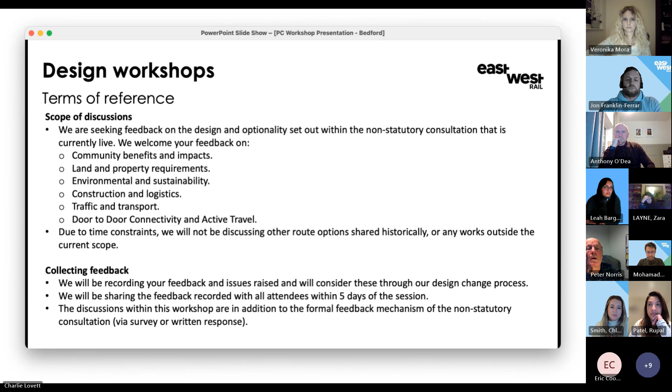Next slide please. So as well as these online workshops that we're carrying out with the LRG parish councils and ward members, we've also been doing some engagement with the local authorities.

So we had an in-person workshop in December last year with the Bedford Borough Council officers. That was a really good workshop, and we covered quite a lot of ground, but I've listed some of the key topics here. They were especially interested in environmental impacts, so noise impacts, as well as potential flooding impacts in Bedford town centre.

They were really interested around the traffic and congestion impacts of the project, especially in terms of the rebuilding of any road bridges. So had some concerns around that.

We had some really good discussions on the 2 stations, about connectivity, the facilities at those stations, and car parking at those stations.

The Bedford Borough Council are still opposed to the 6 tracks through Bedford Centre and would support keeping 4 tracks. They also gave us some really good feedback around some of the local proposals around the viaduct and the A6 carriageway, as well as Stewartby and Tempsford Station.

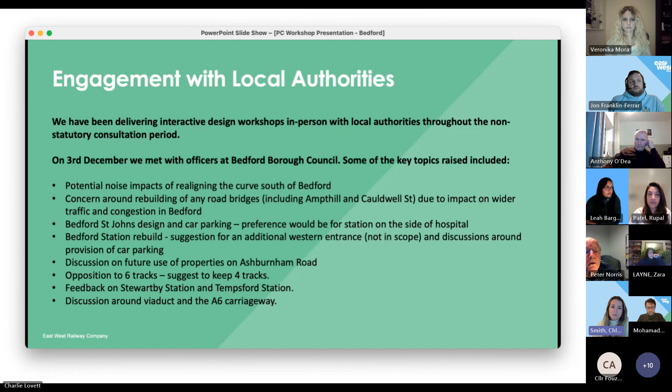So now I will hand over to Rupal, who will give you an update on where we're at with the project currently. Great, thank you, Chloe.

As you know, this is a major infrastructure project with lots going on in the development process, and there's a lot of assessment that happens. So we just wanted to show you a snapshot of the timeline of where we were, where we are now, and where we plan to be in the near future.

So far, if you look back to the beginning of the timeline, we have held 2 non-statutory consultations, a route update announcement sharing our preferred route, and lots of engagement with yourselves through LRGs throughout this process.

We are now in the stage of the process where we're consulting on the current proposals, using all the feedback we get from the non-statutory consultation engagement with all our stakeholders and considering that as part of the design process. So we're not only engaging with yourselves, we're looking at statutory and non-statutory stakeholders as well.

After that period, we plan to move forward by refining the design development, which includes environmental assessment work and mitigation development.

This will then be presented at statutory consultation, and we'll have more information on the impact of the project that we'll be able to share with you.

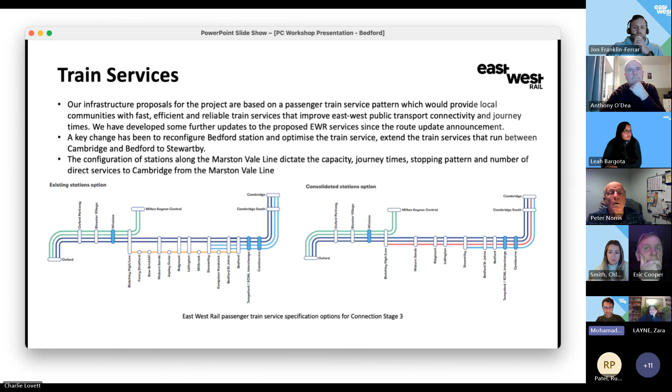There are 2 permutations of the actual service pattern, one aligned with service concept 1 and one aligned with service concept 2. From a Bedford perspective, the same number of trains would operate really - there's no changes between the service patterns as far as Bedford's concerned.

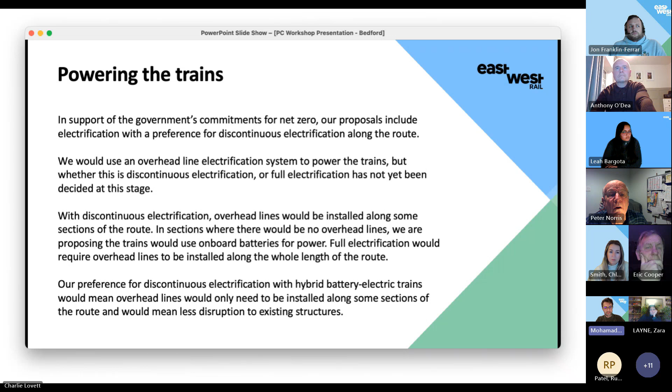Powering the trains, really just reiterating what we announced at the actual events. So discontinuous electrification is our preferred solution for powering the trains, and the implications of that in terms of the infrastructural proposals.

Our principles around freight: reiterating that we are predominantly a passenger service. However, as part of our proposals, we're aiming to maintain the existing freight in key commuter hubs, including Oxford, Bicester, Marston Vale Line, and Bedford. We're also considering planned increased future growth required to enable wider economic growth, and these proposals will mature as part of the next consultation.

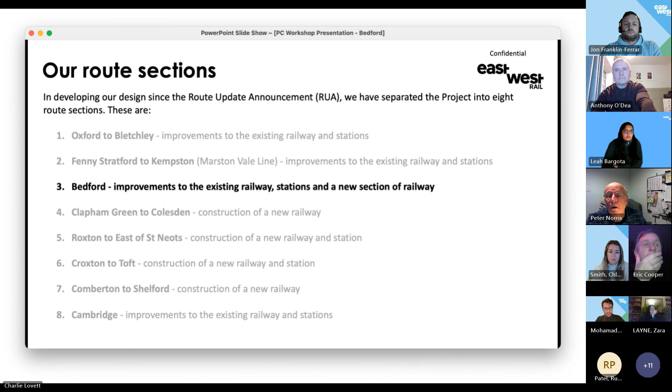Just the generic summary slides, which hopefully you all know about now. The Bedford extension spans 5.4 kilometers, that's section 3 in the consultation, from Ampthill Road in Kempston to Clapham Road, next to the River Great Ouse. I already talked about the 2 platforms at Bedford Station, so I won't repeat that.

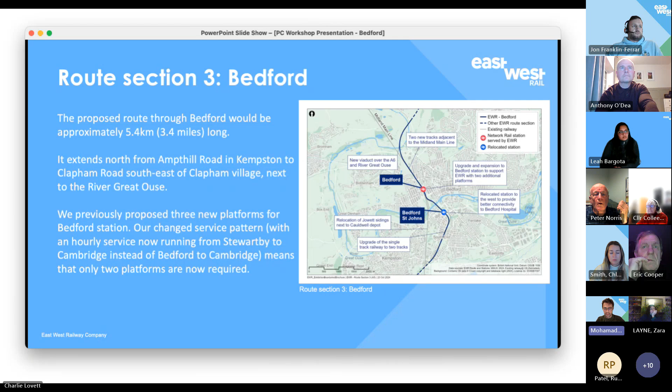A summary of the scope or proposals really. These will be talked about in more detail when Jon presents and shows you plans and profiles. But in essence, we're relocating Bedford St John's Station to the site of the current Britannia Road car park, closer to Bedford Hospital.

We're building a new multi-storey car park to replace lost car parking, owned by the hospital as well as other stakeholders in the area, as well as considering what happens during the actual construction of the multi-storey car park. We're building 2 additional tracks across the entire area.

If you think about the realignment at BSJ being a new piece of P-way, we're moving Jowett sidings to the Cauldwell Walk depot area, making space for the railway. We're building a new station at Bedford Station and providing other station improvements. And last but not least, we're building a 1.1 kilometer viaduct that crosses several highways and the Great River Ouse twice, to join an embankment in the core section.

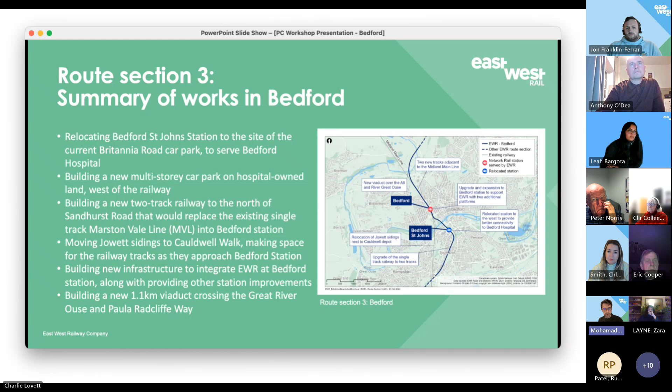Area in Clapham. I'll just hand over to Leah to provide some slides on environment.

Thanks, Mo. So the environment is a key consideration in the development of our proposals, and to demonstrate our commitment to this, we are taking a proactive approach in terms of environmental considerations, using environmental data as a fundamental part of developing designs that avoid, reduce, and compensate for potential impacts on the environment.

Since 2021, the government has published a new policy setting out its environmental goals, and in response we've updated and aligned our environmental sustainability strategy, also published on the East West Rail website. Central to our approach are the 6 environmental sustainability pillars: natural environment, carbon, climate resilience, historic environment and landscape, circular economy, and people and community.

Moving on, further consideration of the potential likely environmental impacts of the proposals and initial mitigations are described in the environmental update report. This is also included as part of the consultation and available on our website. The mitigation proposals can be viewed on the plan and profile drawings, which also support the consultation.

We will prepare a preliminary environmental information report for the statutory consultation, as well as producing an environmental statement, which will be submitted as part of our application for the development consent order. Further design development will take place in parallel with the environmental impact assessment and supporting surveys, modelling, and technical assessments. Information on the EIA process will be used to inform the development of appropriate mitigation measures as part of the ongoing design development process, and will also support more detailed analysis of biodiversity measures needed to deliver biodiversity net gain.

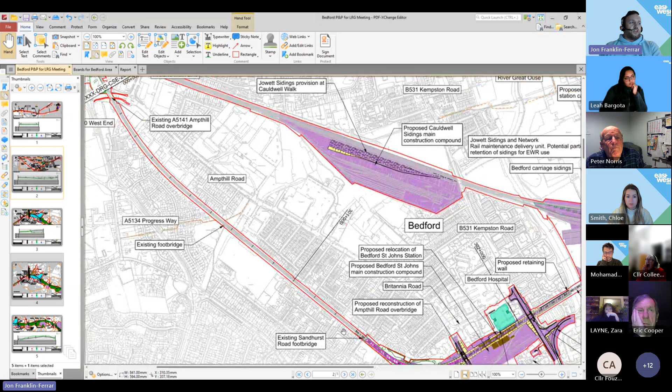The first 1.3 kilometres of the Bedford section runs from the crossing of Ampthill Road overbridge at the top of the drawing through to the start of the MVL curve. This curve here, just to the south of Bedford St John's station, is largely unchanged. There's no proposed realignment of any of the track. Any works undertaken in that area would be inside the existing rail corridor.

So the specifics of any interventions in there will be determined as we go on. It's likely to be things like changes to signalling, moving of track joints and things like that, but work within the corridor. So there is nothing of significance in that first 1.3 kilometres that is worth going into any detail of today.

Once we come to Sandhurst Road footbridge, this is where the existing railway goes from the 2-track corridor that we have on the left here to the single track railway that runs around this very tight curve and through the existing Bedford St John's station. The radius of this curve is approximately 180 to 200 metres.

It's very tight, so from a railway geometry perspective, that is much tighter than we would typically like. It is necessary to realign that curve for 2 reasons: to achieve the required permissible speed for the train service specification, and in conjunction with that, the relocation of Bedford St John's station.

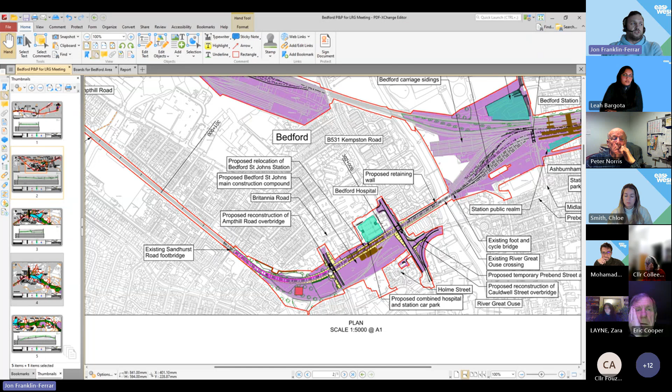I will talk about Ampthill Road and Cauldwell Street together in a second, but first, as we go into the Bedford St John's station area, the multi-storey car park that is being proposed is located to the west of the railway. It's sited on part of the existing surface car park, positioned to correlate with the master plan of the Bedford Hospital, who have plans for a multi-storey car park in that area as well. For simplicity, we haven't shown all the details of the station on this drawing because it wouldn't be clear, but you can see the two platforms. There are station buildings and facilities shown on the east, with the intention that they could be accessed from the east through the Melbourne Street car park.

Once we go past the station, we climb up to the crossing of the River Ouse. There are two crossovers proposed in this area between Cauldwell Street and the River Ouse. Once again, we haven't shown them on this drawing just because you wouldn't be able to see the detail, but that is a piece of track infrastructure necessary for the operational movements of the trains.

Ampthill Road on the left here, Cauldwell Street on the right. Realignment of those highways is necessary for two reasons. The primary reason, however, is the inclusion of provision for overhead electrification of the railway. What we have aimed to do is minimise the change to these highways by lowering the railway as much as we reasonably can, whilst lifting the highways as much as is necessary. Once again, this is a very fine balancing act.

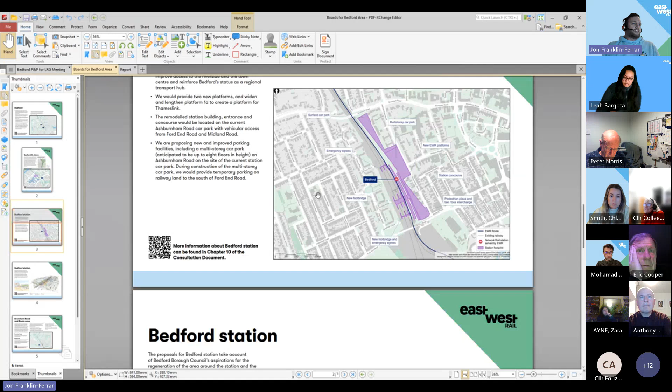Well, let me go to these slides. Hang on, let me see if we got the... that's not in there, it's in the report. Hang on a sec, let me find the right picture for you. It's easier for me to describe. Okay, so...

The pale blue line going along the centre of the highways is the extent of the realignment. Because Cauldwell Street has to be lifted to achieve the electrification clearances under the bridge, and because of the existing steep gradients on that road, it takes quite a long time to regrade the highways back to the existing level, which is why it extends so far.

What that results in is that the entrance to the car parks for the two businesses ends at a level difference between their car park and the road, so you could no longer turn from the main road into their car park. So what we've looked at is whether there's an alternative access, and potentially there is from the rear via Holme Street. So that's the principle of where that bit of the design has come from.

Okay, thank you. Councillor Atkins asked quite a lot of questions during your presentation. Have all of those questions been answered? My apologies, I'm not looking at the chat.

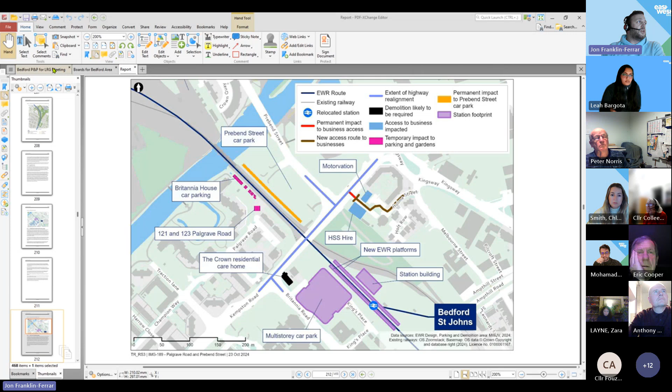These are the prefacing questions that were asked about whether we'll commit to replacing car parking before construction, etc. In terms of the proposals for replacing car parking, the intention has been that the multi-storey would have to be constructed and operational before the rest of the surface car parking is removed.

And there was another question about the impact from noise at a Cauldwell depot site due to the relocation of the sidings to the industrial estates.

So I can talk about that very briefly, but we'll go into that detail when we talk about area 2. Yeah, I suggest we cover that off in the next area. Yeah, just please remind me of the question.

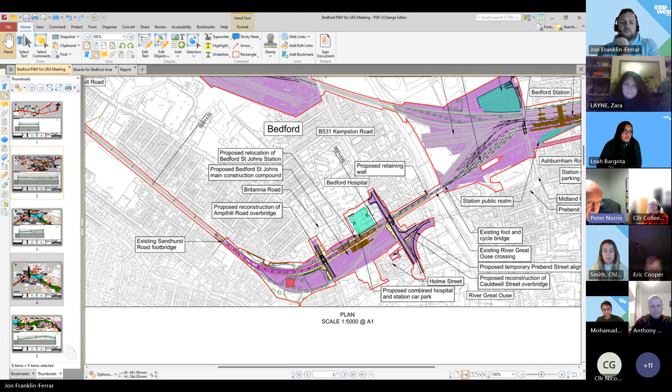Now, your presentation earlier said there's an alternative plan for a car park within the hospital's grand plan, which raises the question of how the two plans for a multi-storey car park sit together and who's going to be footing the bill. Are you able to confirm that the answer given to me by your chief executive is correct, and that the multi-storey car park is part of your build and part of your expected expenditure, with no further liability to anybody else, NHS or the borough, please?

Sorry, Peter, I'll just come in and try and correct the record. We're not suggesting there's going to be two multi-storey car parks near the hospital. The only car park that's proposed is the one shown in green on that drawing, and it's also the one being proposed by the hospital. The hospital's already got plans for building a multi-storey car park, and in displacing the car parking in the area, we feel it's appropriate that we replace it at the location that they want it replaced.

In terms of funding the car park, in terms of the capital costs, the position conveyed to you by David Hughes and Will is correct. We will be funding the car park. So we will be building the multi-storey car park at this location.

Yes, that's correct, but there's only one car park, it's not two. No, I understood there's only one car park, it's just that there were two plans to provide the one car park. Sorry, two plans to provide the car park is correct, I misunderstood your question then. Yeah, no, it's just only one car park, built by East West Rail and paid for by East West Rail. Correct. Thank you. Great, thank you.

And a final question or feedback from Councillor Headley. Yeah, thank you. I mean, obviously, again, talking about the same bridge. Obviously, the best option is not to have to do anything to the bridge. And you said there were two reasons: one was the electrification, and one was the crossing in the section before the bridge.

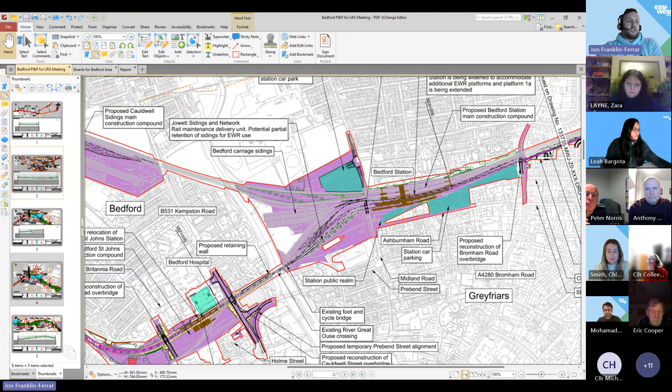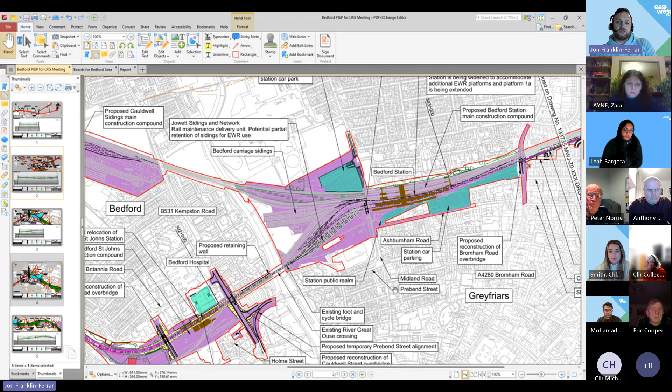As we come over the River Ouse, the crossing is a fixed site, both horizontally and vertically. The work undertaken thus far concludes that some strengthening works would be required on that structure. However, we are hopeful that the structure itself would not need to be replaced. If it did turn out that it needed replacing, it would need to go in the same location, horizontally and vertically, because you cannot move the track horizontally or vertically in any significant manner at that point.

Once you are north of the river, we continue with the two-track alignment that goes through the northern end of the existing GTR Jowett stabling roads and under Ford End Road. Because we sever the end of these roads, they are no longer viable for GTR stabling. They stable 12-car units here, which are 243 meters long, I think, off the top of my head. So if we remove some of that track, it's no longer viable for that rolling stock.

Therefore, we have to relocate on a like-for-like basis elsewhere. The preferred option for relocation of those stabling roads is down to the Cauldwell Walk site. What's shown here at the moment is the 5 stabling roads on a like-for-like basis. In reality, a lot of other additional infrastructure in terms of buildings, offices, and everything else associated with running the depot would be within the rest of the land on this site, but for simplicity we've just shown the track footprint at the moment.

Where the boundary goes around the existing Cauldwell depot, and we're showing the construction site across everything, that's purely where rail systems would have to be tied in. So there is no intention of changing anything within the existing rail depot. It's simply there in terms of the ability to tie in all the rail systems to make sure the Midland Main Line, the proposed sidings and the existing sidings all work safely together.

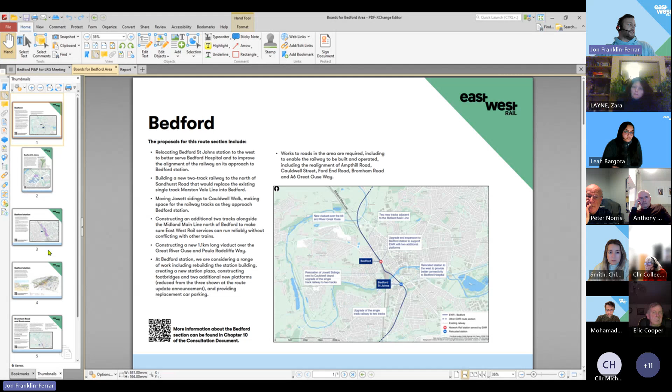The design does not preclude the incorporation of the Prebend Street diversion. We are not integrating that piece of infrastructure specifically because, as I understand at the moment, it is not funded, but our design does not preclude that piece of work.

We've got taxi and private car drop-off, bus stops, the multi-storey car park, and a reconfigured surface car park. That's what there is to say on this bit, and as we head up to Bromham Road, I'll talk about the specifics of that when we get to the next section.

We have a couple of questions. Yeah, so let's go, Peter, do you want to go? Oh, sorry, I shouldn't have my hand up. Oh, okay, no worries, that's right.

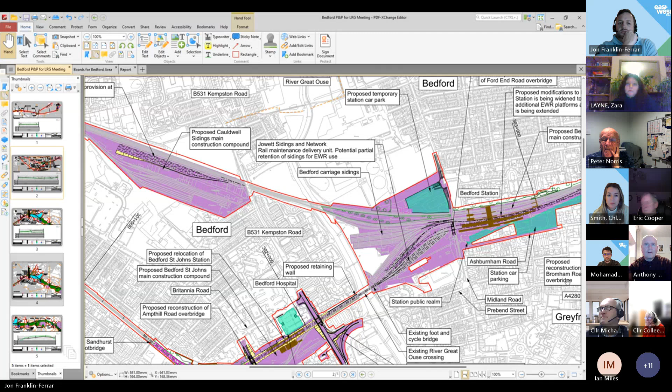That'll be something governed by standards. Things do change—I think that Luton fire was started by a battery fire. Standards at the moment only require fire suppressant and sprinklers for underground car parks. Our point is we want you to go beyond the standards. That's fair enough—I'm just saying where our baseline is, and it's so early at this stage we haven't even got an outline design beyond the sizing Mo described. But the outline and detailed design will pick up items like that. If you've heard us now, it might influence your thinking as you go to the next stage.

Any other feedback points or questions around Bedford Station? The question I'd ask for feedback on is: we've spoken a lot about the scale of the car park, and yes, it is a large building, but what other items do you think would be appropriate to consider? Mo mentioned potentially splitting the car park, and we've shown a temporary surface car park south of Ford End Road. Have you got any other thoughts, or do you think there's a better solution? Really, all ears for feedback.

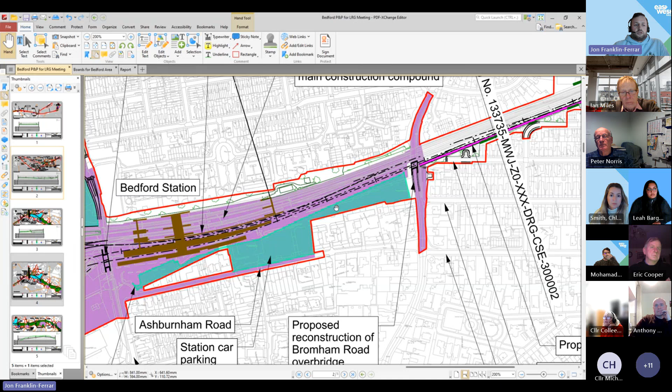What about the surface car park that's been suggested over on the west? What if that was a multi-storey car park instead of having something on Ashburnham Road? It's an option, I think I'd like to see a little bit more about it. It's not my area, as I say, it's Councillor Ben Foley's area, and he would probably be better placed to make comments on it. But I think any options rather than the big overbearing one on Ashburnham Road would be advantageous.

Thanks, Eric. Yeah, I've just got a general comment, not put down. When you come to do the design, the physical appearance of the station surrounds, can you make it iconic, interesting, and actually make it something which adds to the public realm there, not just a low-cost functional building? Because I have to say, the station at Bletchley, as it's been done so far, isn't very exciting, and this is going to be a public building for generations. So the ask is to make it as exciting as you possibly can.

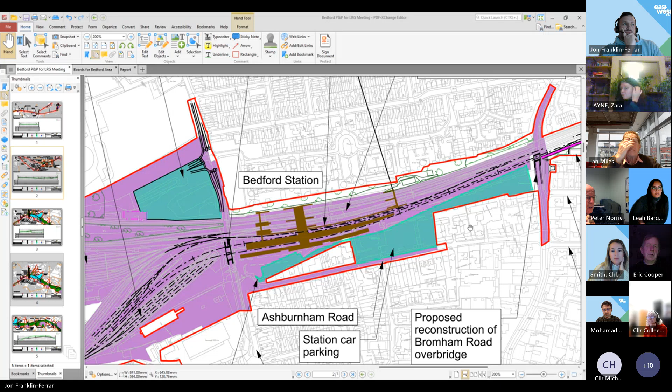Okay, thank you. I think Leah just kindly reminded us of the question from the councillor earlier around the noise at the sidings. In terms of the specifics of what the existing noise levels are and what the proposed noise levels would be, I don't have a quantifiable number I can give. But as I understand from the Borough Council, they were rather keen on this as a location and saw it as a much quieter neighbour than some of the existing businesses on this site.

In the examination for the 2040 local plan that I got a transcript for, there was some sort of soft endorsement for the proposal in that it actually reduces the nature of the noise and operations of that site. So in general terms, we're expecting an improvement on noise levels as a result of our proposals. Unusually, I should add, but yes, I think this is one where we're expecting a reduction in noise levels, but that will be demonstrated by the modelling John and team are undertaking in the next stage of the design.

It's probably worth reminding that this infrastructure we're proposing is designed as stabling. This is not a heavy maintenance or light maintenance depot or anything like that. It's replacement of stabling tracks, so it's literally parking your trains there. It's probably not what a lot of people think would be going on there.

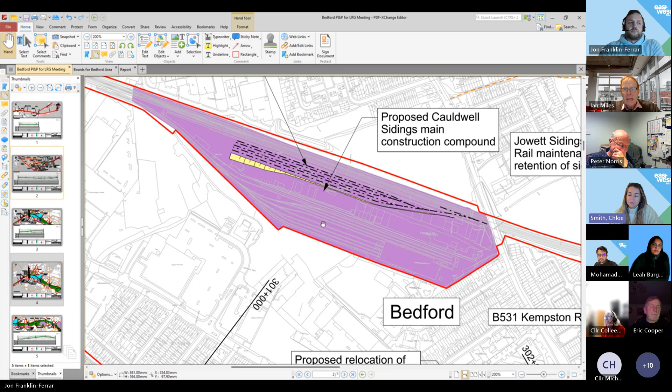Brilliant, thank you Leah. So I think that's right on time. We've just finished the Bedford station area, so John, if you're happy to, let's start to move north. I'm going to do this very quickly because I'm conscious we've got 21 minutes left.

So from Bromham Road, as we've said earlier in the call, the proposal is for 2 additional tracks to the east of the Midland Main Line. Those tracks would run parallel to the existing railway for approximately 900 metres. Where we pass under Bromham Road, it would be necessary to provide an additional span to that structure. Back in 2020, when the Midland Main Line was electrified, the brick arch structure there was replaced with 2 flatter deck spans.

It would be necessary to add a third span on the eastern side to accommodate the 2 additional tracks. The intention is that the highway would remain at the same level due to the existing gradients heading east; the opportunity for realignment of that road is extremely limited. So the design proposes to have the tracks slightly lower relative to the Midland Main Line to gain clearance under the structure before coming back up to the same level. We've got some crossovers between the 2 pieces of rail infrastructure, and then we stay with these 2 additional tracks through the Poets area, where we're very aware of the impact on properties.

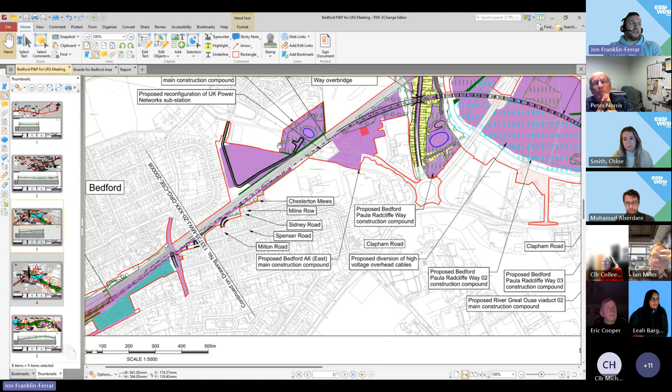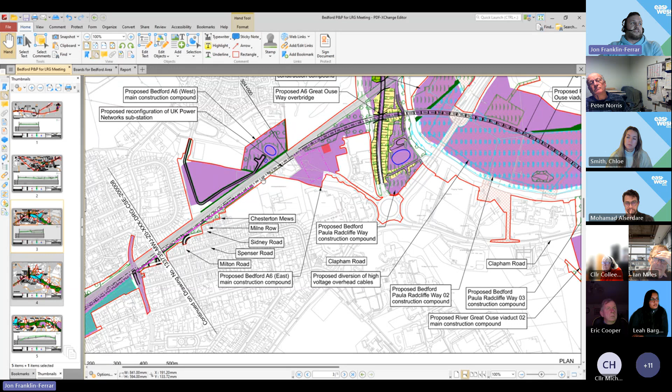As we go north of the Poets area, on the western side of the railway, we have proposed drainage attenuation and environmental mitigation with access to that site. We've gone past the UKPN substation site. There is reconfiguration of that substation in the vicinity, necessary where the East-West Rail tracks run alongside its current boundary fence.

Once we're past UKPN, the East-West Rail tracks diverge from the Midland Main Line and start to climb. We cross the A6 Great Ouse Way. It is necessary to realign the A6 Great Ouse Way because we cross it effectively at grade. I'll show more detail on that in the next drawing, but the alignment of the A6 goes over the railway before dropping down to the roundabout here.

Just north of the A6, we go onto a viaduct, so that crosses the River Ouse. It then crosses Paula Radcliffe Way. It crosses the River Ouse again before crossing Clapham Road, and the abutment of that viaduct, where we go from structure to earthworks, is the limit of Route Section 3, which is the Bedford area that I'm responsible for.

Within this area, there is a lot of environmental mitigation. There are other pieces of necessary infrastructure in terms of drainage ponds and access roads. We've got utility diversions, and a lot of environmental mitigation following the River Ouse. The pink hatched areas relate to the utility construction zones, so that's where certain utilities are being rerouted.

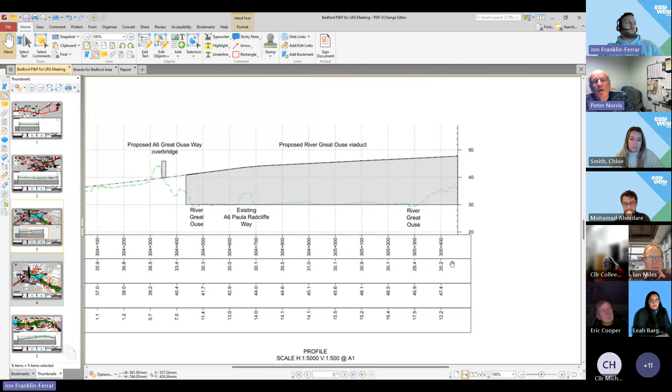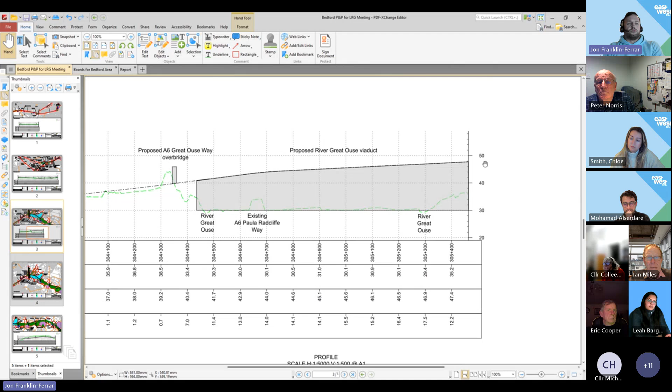If I go on to the profile here, you can see that the vertical alignment of East West Rail, as we go across the floodplain, is up to just under 18 meters above ground level at its highest point. The vertical design through here is dictated by the clearance over Paula Radcliffe Way. So what we're trying to do is get under the Great Ouse Way, over Paula Radcliffe Way, and there is effectively a fixed gradient, or two fixed levels, that you're trying to get between. Then as we go off this drawing into the core section, the elevation is dictated by what's happening as we head towards Cambridge.

I think that's the whistle stop tour. I know there's going to be lots of comments on this, so I think it's probably best if I go back to all of you good people for feedback.

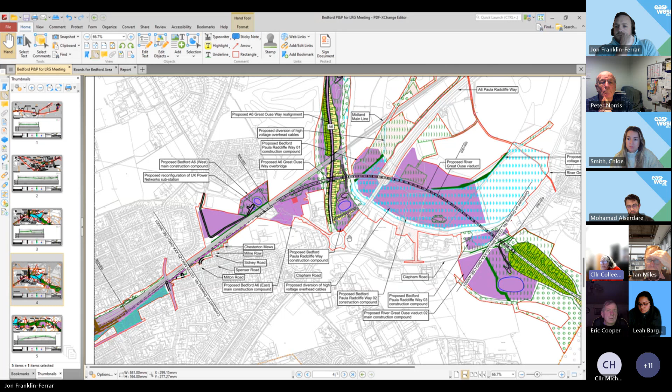Great, thanks Jon. I've got a question from Colleen. Thank you. First of all, I think there are three distinct discussions on this: one is the Poets area, one is the A6, and then the third one is the viaduct. I would find it helpful if we could take those in turn, as opposed to jumping from one to the other.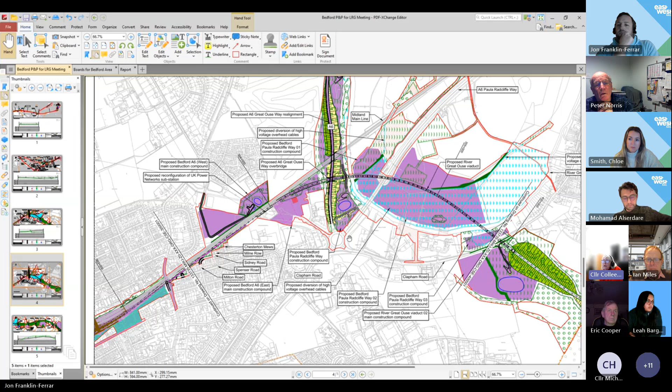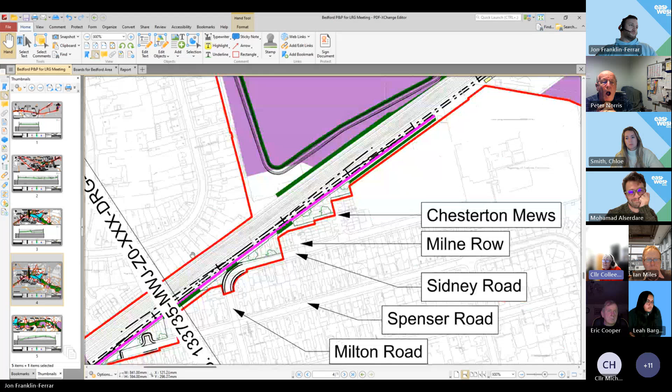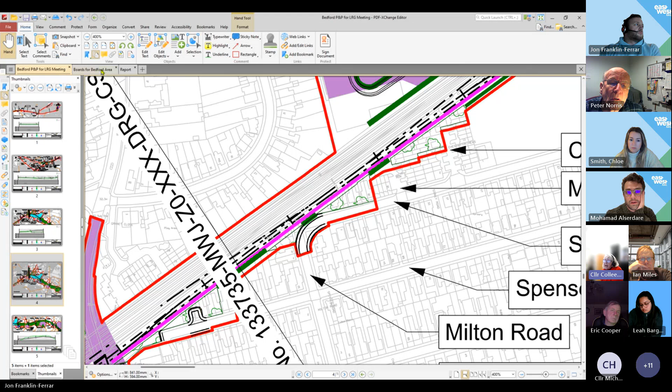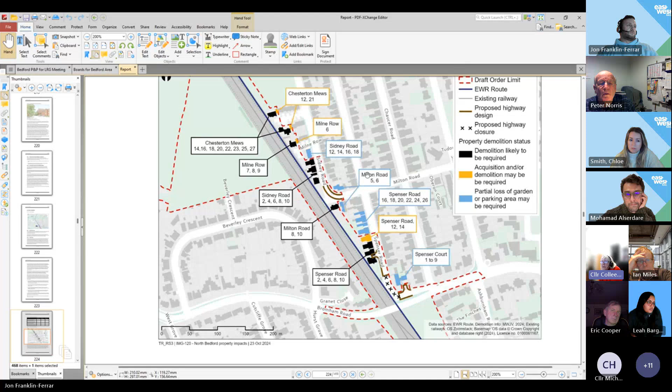Happy to do that. Mo will know that at each of the LRG meetings, Zara and I have made it quite clear that we oppose the demolition of any homes. I wonder if you could enlarge the screen so we could take a look at the Poets ones. That's better, thank you. First of all, you'll note that the numbers go across, so we can't actually see some of the houses which are affected. I was wondering if we could have a map without those numbers on, so I can see exactly where the lines are going, the red line. That's by the by. The first thing, we'll start with Bromham Road Bridge. I mentioned this at a meeting on Tuesday when I went to the St Neots consultation event. The Bromham Road Bridge—obviously none of this, we don't support any of this, but we need to talk it through.

If you notice where you've got the turning point for Spenser Road at the very bottom, there is a community garden there. When Network Rail were doing the reconstruction and the whole road was closed, the community garden was lost. I did mention this to Tristan on Tuesday, so he is aware of it. But there are also some 5 very mature 150-year-old plane trees in that area, and I would like to make sure they are protected.

I support, or I don't mind, the stopping up in Chaucer Road. As we move on to the demolition of homes, as I say, we cannot under any circumstances support it, and I'm really pleased to see that the council have yet again supported a 4-track, believe that the 4-track is an option, and that the 6 tracks are not necessary. So we will be supporting the council's view on that.

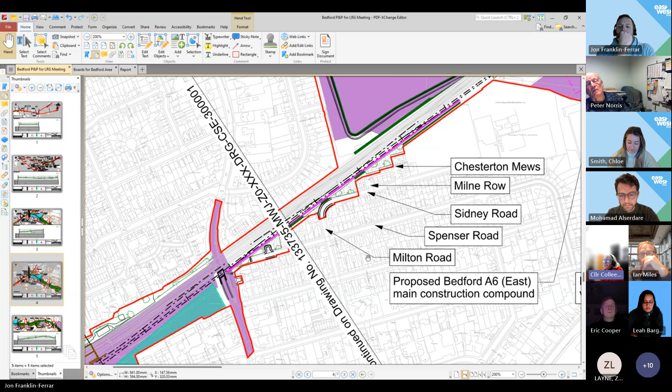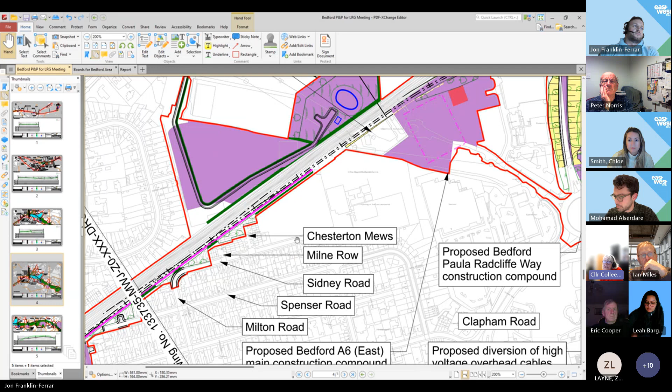I've got two questions. One is about the Alexander Sports Field being in the local plan as a green space, so hopefully that will stay. But my question is about this compound at the back of Beverley Crescent - the Beverley Crescent properties are just outside, though one or two gardens look like they're within the red line. Has there been consultation with local residents about the mitigation of noise, etc., from the compounds?

Sorry, Colleen, I didn't get the last question. Has there been consultations or talks with local residents who back onto that purple area from Beverley Crescent, which I think is a compound? Not to my knowledge is what I would say, Colleen, although I would have to check the records.

This is the process we're going through, in as far as we've only matured our construction compounds to a point where we can actually consult on it. Essentially, the non-statutory consultation has kickstarted this process, and as part of the actual consultation event, we've had people provide feedback, and we hope that feedback will be received as part of the consultation as well, so it will be a formal response. But equally, if you feel like we should be going out to speak to them, I'm willing to take away an action to do that as well at the close of the consultation.

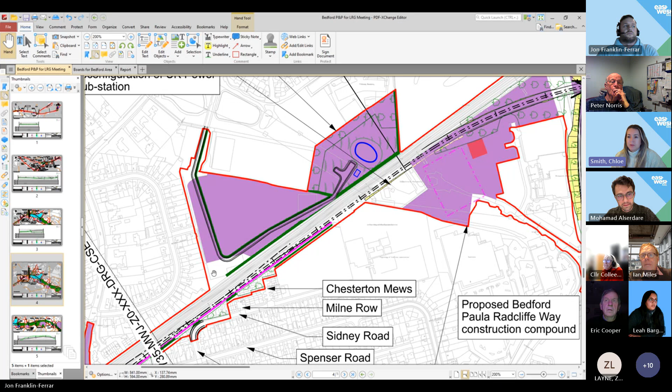If you're happy to, are we finished on this area? Are you happy, Colleen, that we're finished? We're never finished on this area. For tonight, just to let everyone know. Happy to move on, yeah.

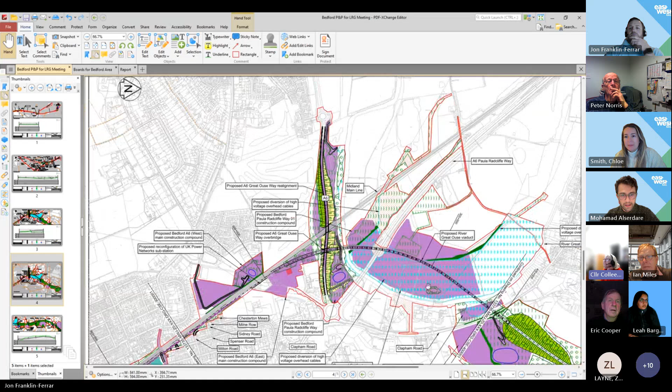These workshops will be ongoing throughout the year, so we're planning to do them every 2 or 3 months. And as I said, next time we hope to meet you in person, so we will be able to go over a lot more detail. Eric, I think we have time just for your questions or feedback. Excellent, and then we'll wrap that up. Great, thank you very much.

I just want to draw your attention, based on the conversation just had, that with HS2 there are funding opportunities there, and you may want to investigate that - the homeowners payment scheme for properties up to 300 meters from the line. So if they can do that for HS2, why can't it be done for this? And they've got all other funding - community and environment, business and local economy funds. I just wanted to draw your attention to that, where that is to help people build on what is going to happen.

Moving on very quickly - freight. I understand through the grapevine, other people attending various events etc., that you're looking to potentially revisit the 1 in 80 gradient to a 1 in 100 gradient. I just wanted to be clear, are you going to do that? Because if you do that, that will make a difference to the height of the viaduct. And it's very unfortunate that Clapham is split into two here, because the embankment and the cutting are very much part of this. So that's my first question - are you looking to have a redesign here?